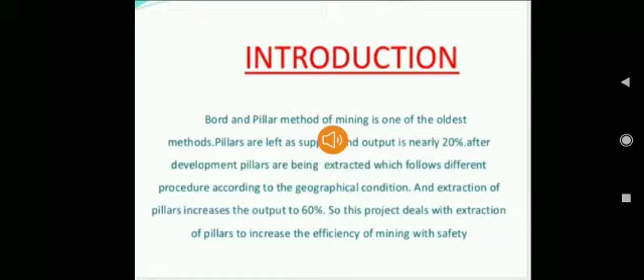Let us start with the introductory part. Bord and pillar method of mining is one of the oldest methods. Pillars are left as support and output is nearly 20%. After development, the pillars are being extracted, which follows different procedures according to the geographical conditions, and the extraction of pillar increases the output to 60%. So this project deals with the extraction of pillar to increase the efficiency of mining with safety.

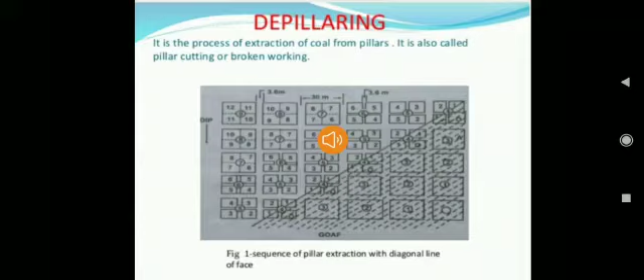Now let us talk about the process of depillaring. It is the process of extraction of coal from pillar. It is also called pillar cutting or broken working. Below is the diagram showing the sequence of pillar extraction with diagonal line of face.

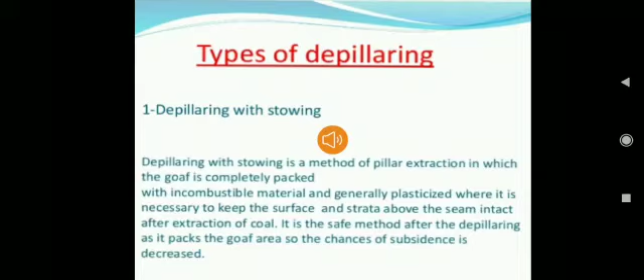Now let us talk about the types of depillaring. The first one is depillaring with stowing. Depillaring with stowing is a method of pillar extraction in which the goaf is completely packed with incombustible material, generally plasticized, where it is necessary to keep the surface and strata above the seam intact after extraction of coal. It is a safe method after depillaring as it packs the goaf area, so the chance of subsidence is decreased.

Now let us talk about the circumstances for adoption of this method. There should be presence of water bearing strata above the coal seam which is going to be extracted. Railway, river, road, etc. situated on the surface which cannot be diverted. Surface buildings which cannot be evacuated. Restrictions imposed by local or government authorities for the protection of the surface.

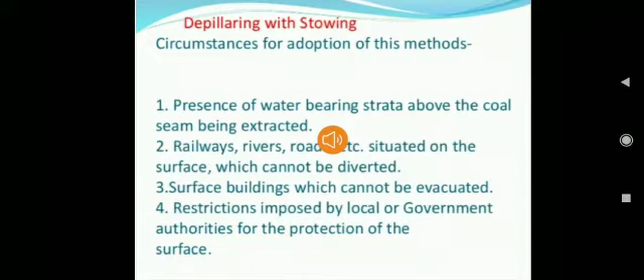Now the second one is depillaring with caving. In this method, the coal or pillar is extracted and the roof is allowed to break and collapse into the voids or the de-coaled area, known as goaf. As the roof strata above the coal seam break, the ground surface develops cracks and subsides, and the extent of damage depends upon the depth, thickness of the seam extracted, and the nature of strata, such as thickness of the subsoil and effect of drag by faults.

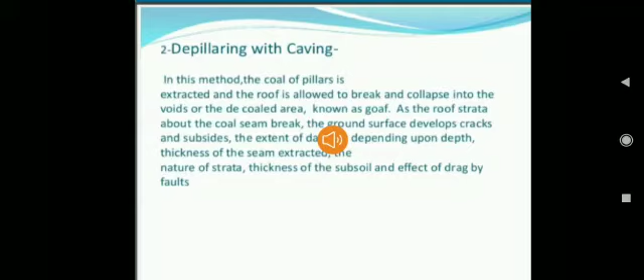Now let us talk about the principle of pillar extraction. The roof surface exposed at one time should be minimal. It should be around 60 to 90 meter square for caving and 90 to 100 meter square for stowing. The extraction line should be so arranged as to facilitate roof control. In practice, diagonal line or step diagonal line of face is common. In special cases, a steep diagonal line of face or even straight line of face has been selected.

Below is the diagram showing the diagonal line of extraction, and at the right side the diagram shows the step diagonal line of extraction.

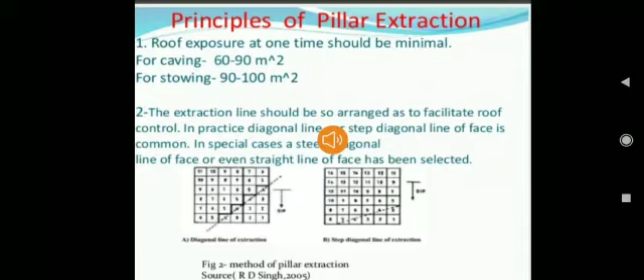Now let us talk about the method of mining thick coal seam. A general classification of methods of mining thick coal seam is summarized in figure 1. Several variations to this method are also tried in different mines.

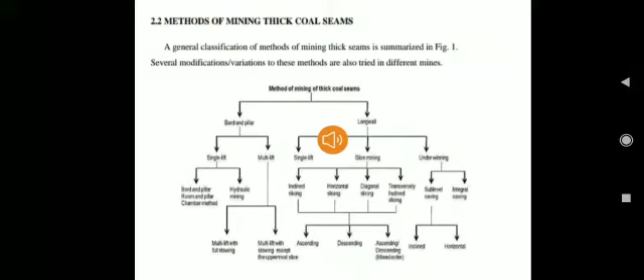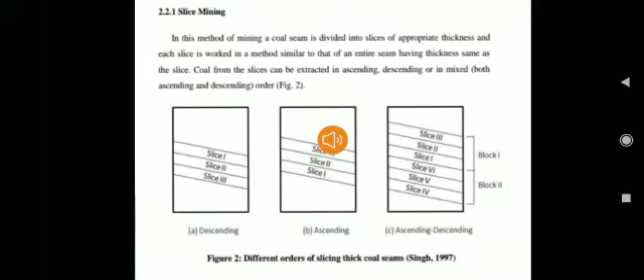So let us start with slice mining. In this method of mining, a coal seam is divided into slices of appropriate thickness, and each slice is worked in a method similar to that of an entire seam having thickness same as the slice. Coal from the slices can be extracted in ascending, descending, or mixed ascending and descending order. Below is the diagram showing the descending, ascending, and ascending-descending order.

Ascending slicing: in this method, the first slice is the bottommost slice which is excavated first. Working of this slice is like working a seam of average thickness. Subsequent slicing is done with stowing, that is, the upper slices are worked on the filled surface of the bottom slice, and therefore ascending slicing cannot be adopted with caving. The last slice can be worked either with stowing or caving.

Now let us talk about mixed order slicing. In this method, the coal seam is divided into blocks, each block consisting of a number of slices. The slices in the block are worked in ascending order with stowing, while the blocks are worked in descending order.

This method is commonly practiced in horizontal slicing method of thick seam mining.

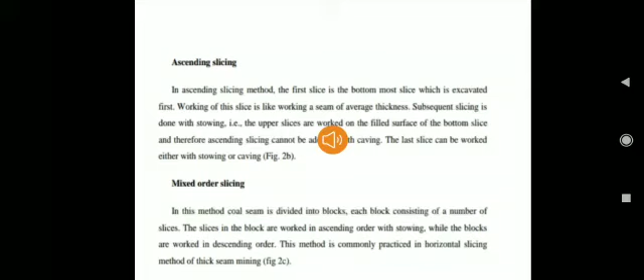Now let us talk about the next method, which is sublevel caving. Sublevel caving is applicable to thick seam with cavable roof and soft coal. Though by blasting, hard roof can also be caved and hard coal seam can be softened.

This system consists of mining a slice along the roof by normal longwall method with caving, with flexible artificial roof laid on coal along the floor of the first slice. Mining of other slice along the floor of the seam and taking down the coal parting between the two slices by long hole blasting, which is loaded out on a conveyor laid along the floor of the seam.

As the face retreats, wire netting over steel bars laid on the floor to form artificial roofing. Some 30 meters behind the top face, another long wall face takes a slice of 1.8 meters along the floor.

The middle coal plate, which is usually thicker than the top and bottom slice, is mined at a distance of 3.5 meters behind the floor long wall face by blasting with long shotholes drilled from under the support of the lower face. The artificial roof prevents the caved stone from mixing with the coal of the middle plate. The mining in the lower and upper slices can be mechanized by shearers.

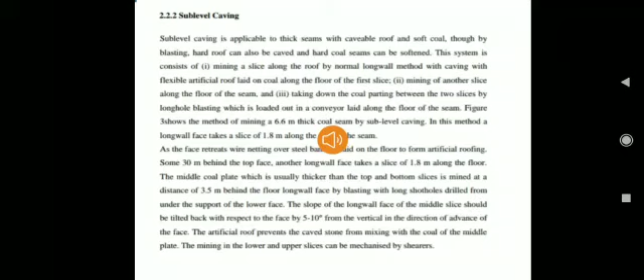Now, this is a diagrammatic layout of mining a thick seam by sub-level caving.

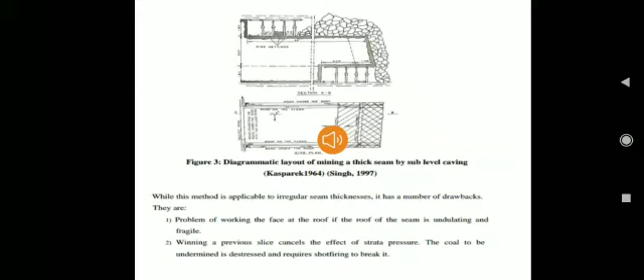While this method is applicable to irregular seam thickness, it has a number of drawbacks. They are: the problem of working the face at the roof if the roof of the seam is undulating and fragile; winning in the previous slice cancels the effect of strata pressure; and the coal to be undermined is de-stressed and requires shotfiring to break it.

Now let us talk about the next method, which is integral caving. The main development is full Soutirage working, or integrated sub-level caving, that is recovering in a single operation all the coal of the seam from a full face progressing on the floor.

Figure illustrates the advantage of these methods: the development cost and the investment in face equipment are well below that required for the method of slice parallel to stratification, and this advantage is still further increased by the fact that greater seam thickness may be worked.

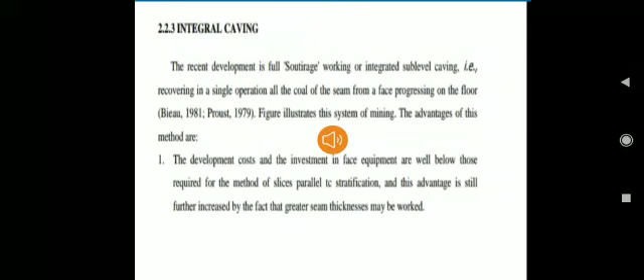Automation of support system with articulated roof bars known as banana. Small number of faces can produce large quantity of coal. OMS is high in this, up to 20 tons.

Now, as we know that when there is some benefit, there is some loss also. So the problem of integral caving working is methane emission. In gaseous seam, methane emission is increased because of high assuring taking place in the sub-level coal above and in advance of the coal face.

As a precaution against gas ignition in gassy mines, blasting should be done with small charges which will only crack the coal mass. Water infusion at low pressure to produce crack is also helpful.

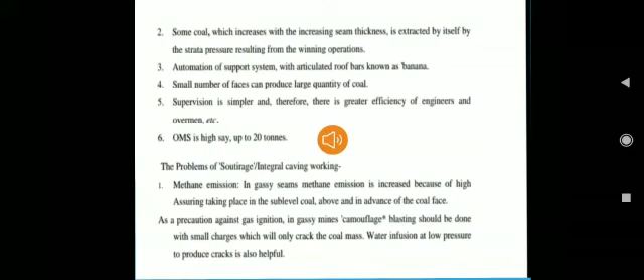Now there is also risk of fire. Crushed coal left in the goaf may catch fire. As a safeguard, the following precautions should be taken.

The working should be done strictly on a retreat. There should be slight dip toward the coal face. This helps in goaf control and also permits firedamp or nitrogen.

Leakage of air should be eliminated. During holidays, the panel should be sealed. Working should be done in a panel which can be extracted within the incubation period.

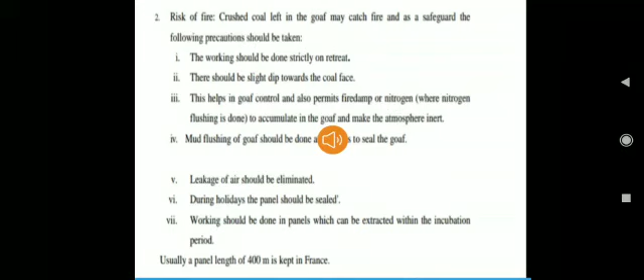Now the seam is extensively developed on board and pillar pattern, where the pillar size varies from 20-30 meters centers along the floor up to 3 meter height. Depillaring by splitting and slicing was planned by conventional cycle of drilling and blasting and manual loading of coal into the mine car tubs, the tubs being hauled by trolley wire locomotives to the surface.